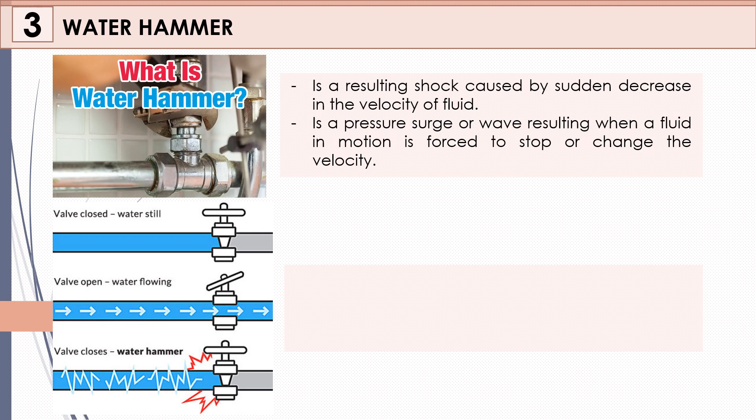Our topic to be discussed this day is water hammer. So first, let us define what is water hammer. Water hammer is a resulting shock caused by a sudden decrease in velocity of a fluid. It can also be a pressure surge or wave resulting when the fluid in motion is forced to stop or change velocity. It could also be defined as water hammer commonly occurring when a valve closes suddenly at the end of the pipe system and a pressure wave propagates in the pipe. It is called hydraulic shock.

So in simple words, what is water hammer really? Or when does water hammer happen in our pipes? So water hammer happens or occurs when there is a sudden change in momentum. For example, we have a moving fluid that if you force it to stop, it's like imagining we're walking and then something stops us from walking, something like that. Or another example is we have a moving fluid and then we change the direction of its motion. So that's when water hammer happens.

So if you look at our diagram, we have a valve closed, meaning the water is still stagnant. Next we have an open valve, the water is flowing, the fluid has motion. And then next we have the valve closed, so water hammer occurs. So this only happens when our valve is open and then we suddenly close our valve.

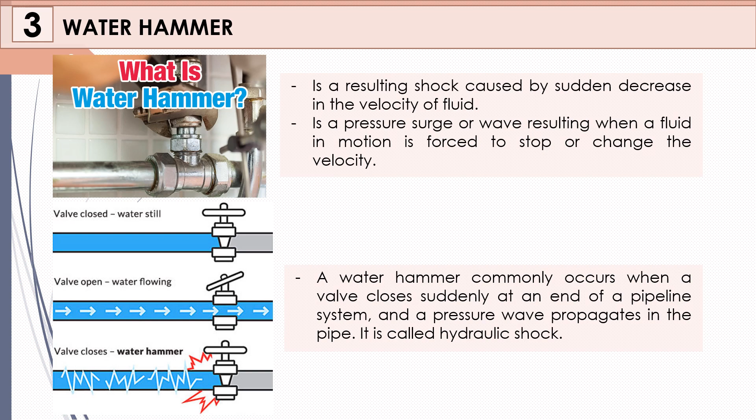Okay, so let us talk about the following formulas that need to be considered when water hammer is what we're discussing. First formula is for rigid pipes, and for non-rigid pipes.

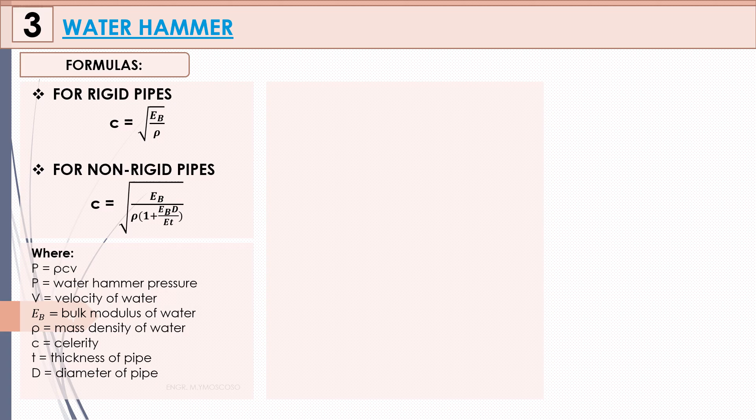So you have there your C. C is what we call celerity. So what is celerity? Celerity is the speed of sound produced when there is a pressure surge. The pressure surge happens when there is a sudden closure of our valve, because we are changing the momentum of our fluids.

So you have here the formula for your rigid pipes, that is celerity equals the square root of EB over rho, where your E sub B is your modulus of water, and your rho is the mass density. So for non-rigid pipe, your C equals square root of EB over rho times 1 plus EB times D over E times T.

So your EB again, that is your bulk modulus of water. Your D, that is the diameter. Your E, that is the modulus of elasticity of steel. And T there, that would be the thickness.

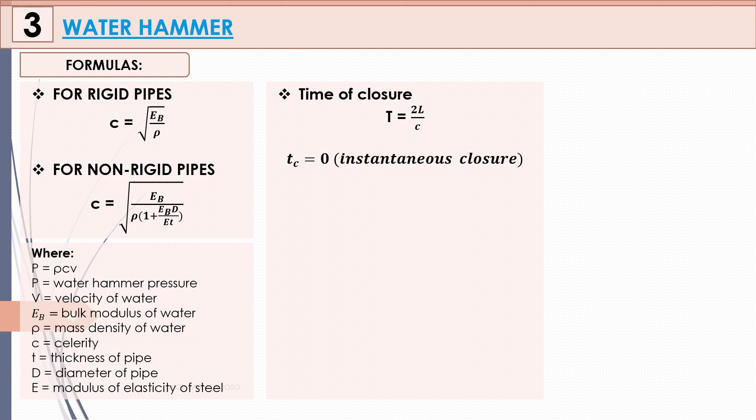So we have three different ways to solve your pressure, but the main equation for this to solve the pressure is P equals rho CV.

But we have three cases. The first case is when the time of closure - this is the closing of our valve to produce a pressure wave - is equal to 0, that is instantaneous closure. The formula we'll use to get the water hammer pressure is rho CV. But in reality, there's really no instantaneous closure, but it's still included among the cases we base on.

Next case is when TC is lesser than T. That means it's a rapid closure - the valve closes quickly. Therefore, the formula we're going to use again is P equals rho CV. Nothing changes, it's the same - lucky when our problem is instantaneous or rapid.

So what about if TC is greater than T? That's the condition given in the problem.

What if the time of closure is greater than the time? That means it is a slow closure. So for slow closure, the formula is still rho CV. It's because the general formula for the pressure when water hammer is being discussed, that is rho CV.

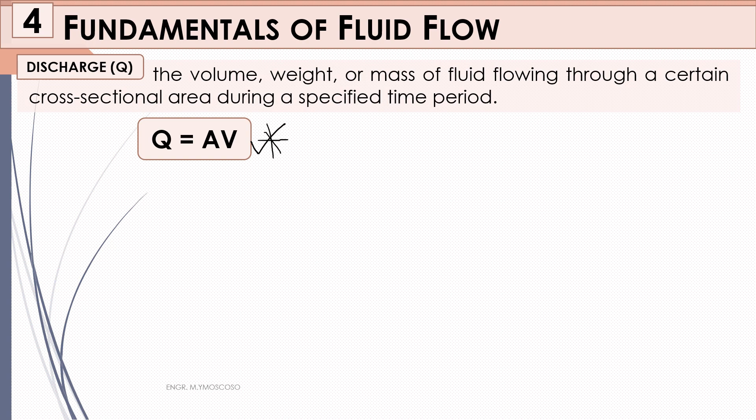What is discharge? It is the volume, weight, or mass of the fluid flowing through a certain cross-sectional area during a specific period of time. The formula is Q equals AV. This is one of the simplest formulas to memorize in hydraulics. If you're asked for one formula in hydraulics, automatically that's discharge, Q equals AV. A is the cross-sectional area of flow, and V is the average velocity of flow.

Discharge could be in the unit of volume flow rate, cubic meters per second, or weight flow rate, Newtons per second, or mass flow rate, kilograms per second. But in most cases, we use volume flow rate, cubic meters per second. So when discharge is what we're looking for, the unit is cubic meters per second.

How does it become cubic meters per second? That is area times velocity, meters squared times meters per second. So meters squared times meters, that is cubic meters per second.

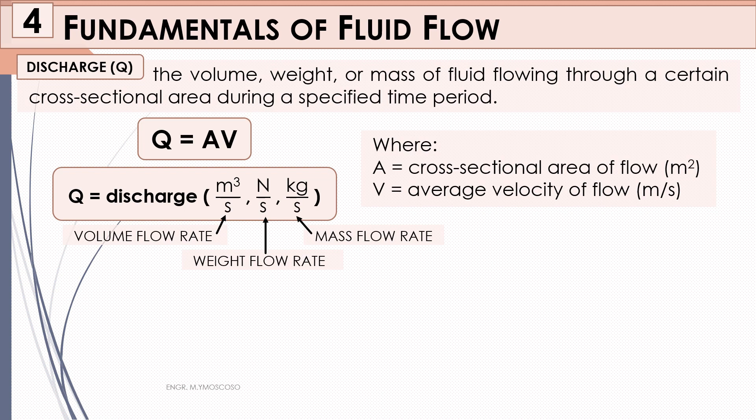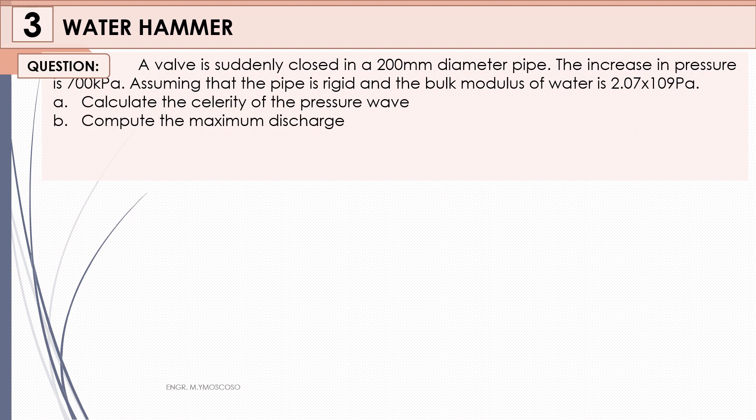Okay, let's solve example number 1. A valve is suddenly closed in a 200 mm diameter pipe. The increase in pressure is 700 kilopascal. Assuming the pipe is rigid and the bulk modulus of water is 2.07 times 10 raised to 9 Pascal. First, calculate the celerity of the pressure wave. Next, compute the maximum discharge. And next, if the length of the pipe is 800 meters long, compute the water hammer pressure at the valve if it closed in 3 seconds.

So what we're looking for is the celerity, that is C, the discharge, that is Q, specifically Q max since it's maximum discharge, and next we're looking for the water hammer pressure.

Okay, let's start with letter A. We're looking for the celerity, or the pressure wave, or the velocity of sound. How do we know which formula to use? Don't we have two formulas for celerity? Yes, that's correct. We check the problem if it's rigid or non-rigid.

Based on the problem, that is a rigid pipe. But ma'am, what if the problem doesn't say if it's rigid or non-rigid? I think, for most problems, when it's not specified what type of pipe it is, it is safe to assume that it is rigid. So what is the formula for celerity when it's rigid?

Yung first formula, yung mas maliit, that is the bulk modulus of water over your mass density. Okay, so sulat na natin. Given pa pala tayo. Since maliit lang yung ating sulatan, dito na lang ilagay. So this is the diameter, 200 mm, 700 kilopascal, this is the pressure, and 2.07 times 10 raised to 9, this is our bulk modulus of water. Lagay natin, 2.07 times 10 raised to 9 over our mass density of water, that is equivalent to 1,000. Therefore, the value is, pause nyo lang habang mag-calculate and then play nyo lang ulit.

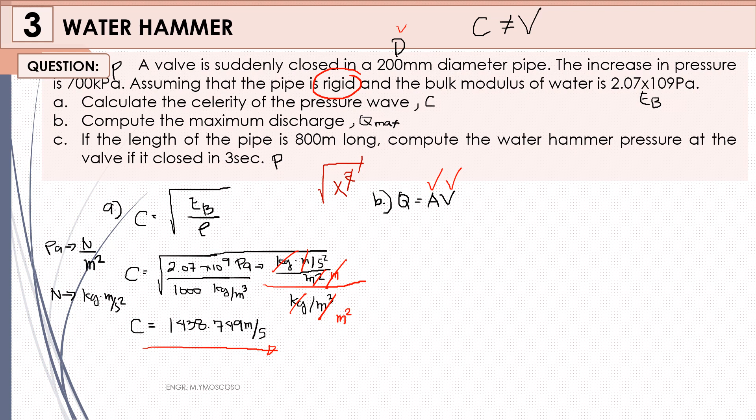Okay, so letter B is to solve for the maximum discharge, that is Q is equals to AV. Yan yung formula ng discharge natin. Area, pwede natin makakuha yung area since the diameter is given. But how about the velocity? May binigay ba tayo na velocity based sa problem?

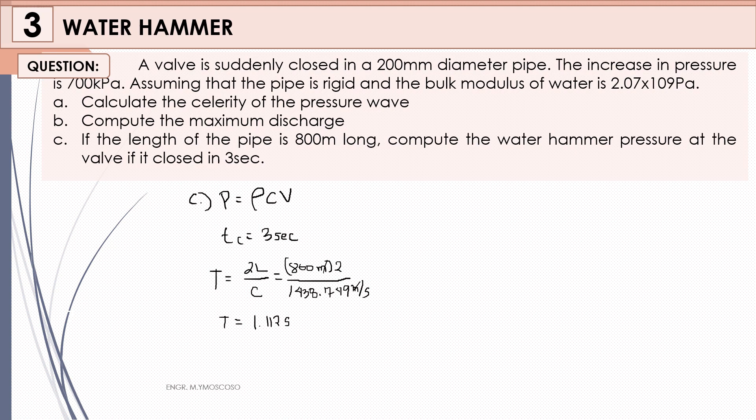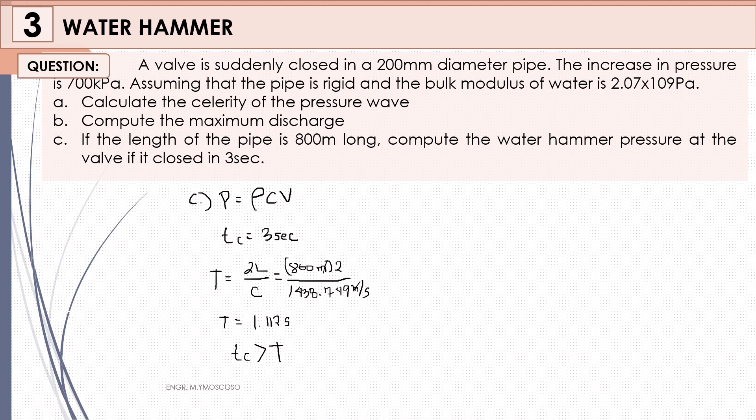So, let us compare the value of our time of closure to the given value of T. So dito, TC is greater than T. Ano ba yan? What type of closure is TC is greater than T? I think that is a slow closure. Tama ba? Slow closure ba?

Okay, so if that is a slow closure, therefore the formula of your water hammer pressure is still P equals rho CV. But the new formula for our celerity should be considered as 2L over TC, nagbago na. So that is equivalent to P equals 1,000 kilogram per cubic meter times the new value of our celerity, which is 2 times 800 meters over 3 seconds, multiplied by our velocity, which is... ilan nga yung velocity natin kanina? I think that is 0.487 meters per second.

Okay, so cancel natin ng units. Meters here will be cancelled, meters here will be cancelled. Maiiwan is square meters. Okay, so 1 over seconds times meters over seconds. Ang mangyayari naman dito is magiging meters times seconds squared. Tama ba? Okay, so kukunin nga muna natin yung value nito.

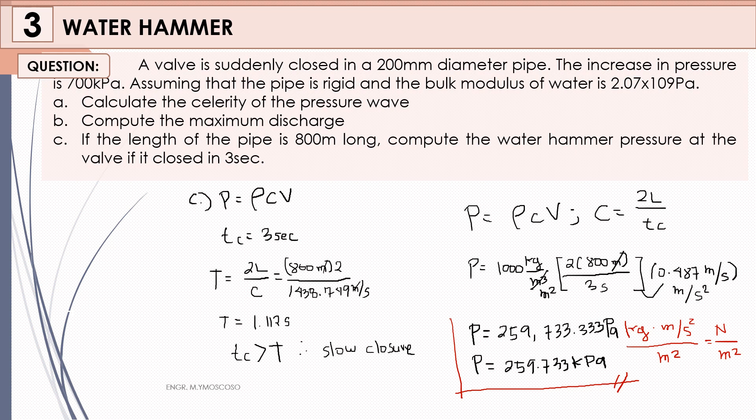Okay, so let's try another example. So you have here a 600 millimeter diameter non-rigid pipe of length 2.5 kilometers with a thickness of 10 millimeters, is to carry water flowing at 0.9 cubic meters per second. The unit weight, the bulk modulus of water, nakalagay dito is EW, or it could also be EB, bulk modulus of water, that is 2.07 times 10 raised to 9 Pascal for water. And you have here the modulus of elasticity for steel, you have 200,000 megapascal. So first question is to find the celerity, that is your C. And next question is to find the water hammer pressure if binigyan tayo ng 4 seconds na TC and 6 seconds of TC. So yan yung mga problema natin.

So marami masyado tayong binigay na values dito. So siguro, it is really necessary for us to write the given para hindi tayo malito. Okay, so meron tayo ditong diameter, which is 600 mm. We have here length, that is 2.5 kilometers, take note naka-kilometers to. Meron din thickness, which is 10 mm. Ano pa? Ano to? Flowing. Water flowing at 0.9 cubic meters per second. Ano ba yan? Yes, that is discharge. Very good. Paano mo nalaman na discharge? Because of the unit. Very good. That is Q equals 0.9 cubic meters per second. At ano na pang binigay? Bulk modulus of water, EB or EW, parehas lang yan, that is 2.07 times 10 raised to 9. And you have your elasticity of steel, that is 200,000 megapascal. I think yan lang yung given.

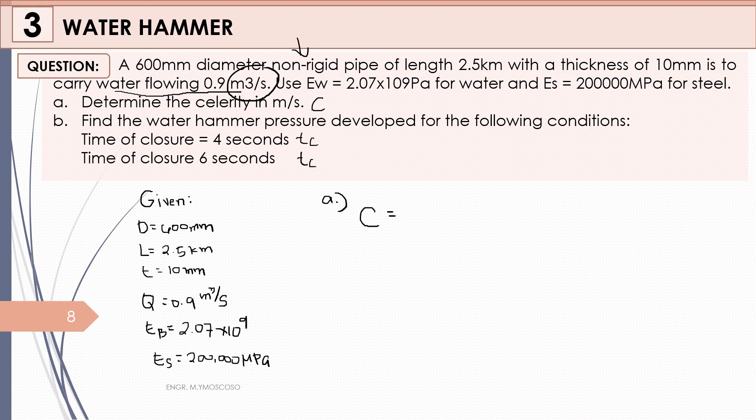Okay, so proceed tayo sa letter A, that is to solve for the celerity. Okay, so is that rigid or non-rigid? Yes, the problem is non-rigid. Again, kapag hindi sinabi sa problem if that is rigid or non-rigid, assume agad that the pipe is rigid. But since klaro naman sa problem na that is non-rigid, so we will use the formula for non-rigid. So ano ba yung formula natin for non-rigid? Yung mas mahaba, tama ba? But don't worry kasi nga meron naman tayong mnemonics nun, no? That is the Itbulaga.

Natandaan nyo pa? Itbulaga pa. 1 plus Itbulaga Dabarkads over it showtime.

So that is the bulk modulus of water over the mass density, times 1 plus the bulk modulus of water times the diameter over the modulus of steel, let's label it ES so you don't get confused, modulus of steel times the thickness. So let's substitute the given values.

So we have 2.07 times 10 raised to 9 Pascal over kilogram. Wait, why kilogram lang? It should be 1,000 first, sorry. So that should be 1,000 times kilogram per cubic meter, times 1 plus 2.07 times 10 raised to 9 Pascal, times 600 mm diameter over 200,000 megapascal times the thickness, which is 10 mm.

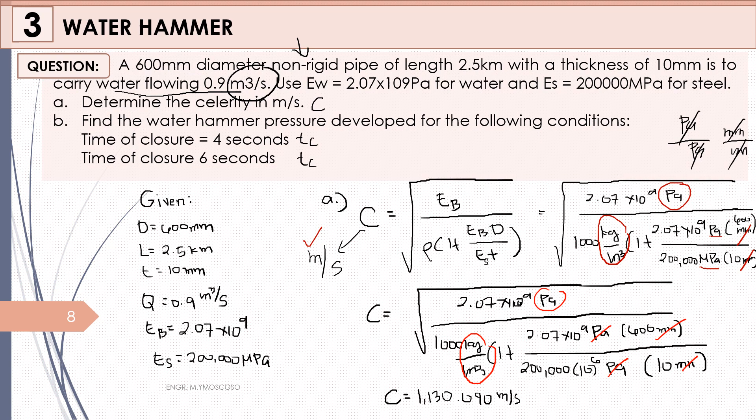Okay, so kindly check if the value is the same, that is equivalent to 1,130.040. That is in meters per second. So please check if you have the same value.

Now let's proceed to solving question letter B. First is to compute the water hammer pressure if the time of closure is 4 seconds. So let's label this B.1. TC is equal to 4 seconds. So we need to solve for T first, which is 2L over C. Our L here is 2.5 kilometers.

So that's not acceptable, we need to convert kilometers to meters, and 1 kilometer is equivalent to 1,000 meters, so therefore this is 2,500 meters. So you have 2 times 2,500 meters over our celerity from letter A, which is 1,130.040. So what is our T? Our T is equivalent to 4.42 seconds, right?

So to conclude, our T now is greater than TC. So what does T greater than TC mean? That's one of our 3 cases — is it instantaneous, rapid, or slow? Yes, I think so, therefore, this is important because during a quiz or exam you need to have a conclusion, that might be worth 1 point. So, therefore, this is a rapid closure.

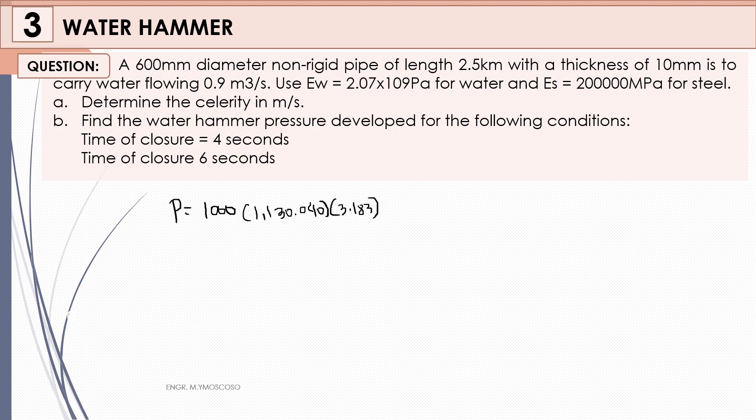Pressure equals 1,000 times 1,130.040 times our velocity, which is 3.183. So isn't the answer in terms of Pascal? Yes, that's what I wrote, Pascal.

So how much is that? I think we're in the millions. So this is 3,596,790 Pascal. Let's try writing it in terms of kilopascal. Divide by 1,000, and that's equivalent to 3,596.79 kilopascal. Let's recheck it.

That's 1,000 times the value of celerity, which is 1,130.040, times the value of our velocity, which is 3.183. Is that value correct? I think it's different. Let's check your values. Let's repeat it to confirm. That is 3,596,917.32, that's in Pascal.

Divide by 1,000 to get kilopascal. That's 3,596.917 kilopascal. That's for letter B, the first question or B.1. It's either of the two since the problem isn't strict on whether it's Pascal or kilopascal.

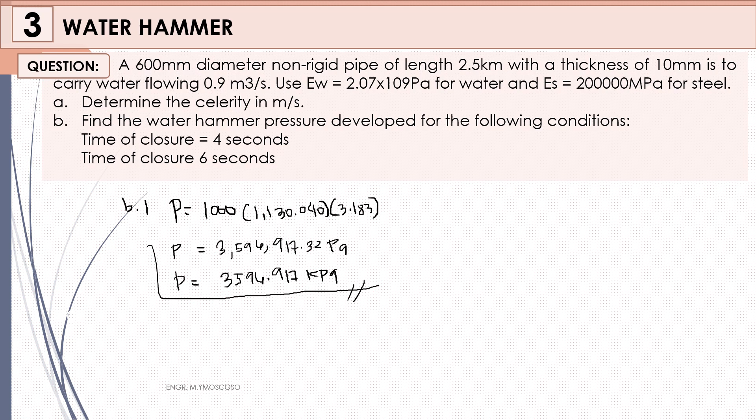Now for B.2, when TC equals 6 seconds. What was the value of T earlier? It's still the same, it hasn't changed. I think that is 4.425 seconds. As you can see, TC is greater than T.

So if TC is greater than T, what type of closure is that? Is it instantaneous, rapid, or slow? Yes, that's a slow closure. It's easy to memorize: when we say instantaneous, what should the time of closure be? TC equals 0. So what matters is whether our TC is greater than or less than T. If TC is greater than T, that's a slow closure. If TC is less than T, that's a rapid closure. So it's easy to determine.

If that's a slow closure, we use the same formula, pressure equals rho C V. But now our celerity becomes 2L over TC. So the values will be 1,000 times 2 times 2,500 over 6, since our TC is 6. Times the velocity, which is 3.183. Let's get the value of the water hammer pressure, in Pascal.

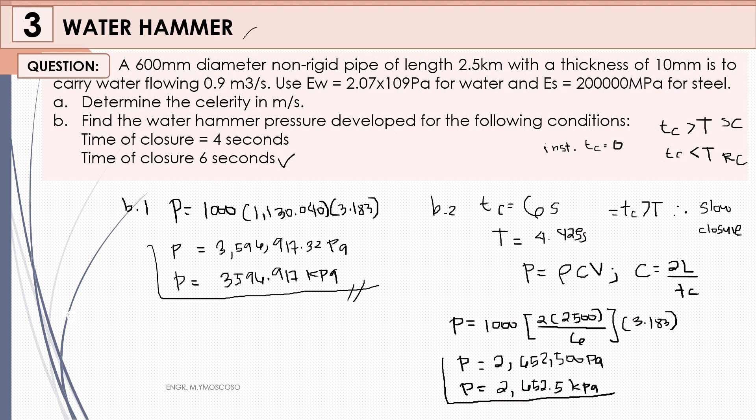So again, a short recap for our water hammer pressure. What is water hammer? When does it occur? Water hammer happens or occurs when there is a sudden change in the momentum of our moving fluids, or a change in direction of our moving fluids. It happens when the valve of our pipe undergoes a sudden closure. Because of that sudden closure, we get a hydraulic shock, or what we call a pressure surge, known as water hammer pressure. And because of the water hammer pressure, it produces a velocity of sound, which we call celerity.

To compute the water hammer pressure, we have 3 cases: when TC equals 0, that is instantaneous; when TC is less than T, that is a rapid closure; when TC is greater than T, that is a slow closure. Where the formula for your pressure is rho C V.